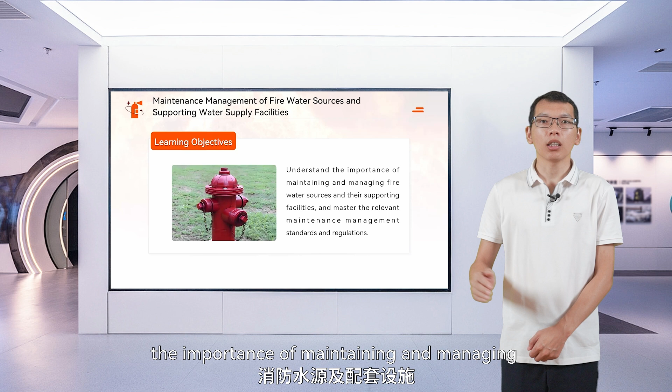Let's briefly introduce today's learning topic, maintenance management of fire water sources and supporting facilities. Through this lesson, you should understand the importance of maintaining and managing fire water sources and their supporting facilities, and master the relevant maintenance management standards and regulations.

Starting from the source end, the maintenance management of fire water sources should comply with the following provisions. 1. Monitor the pressure and water supply capacity of the municipal water supply network quarterly to see if it meets fire extinguishing requirements. 2. Conduct an annual inspection of the normal water level, low water level, flood level, as well as the flow rate or storage volume at low water level for natural rivers, lakes, and other surface water fire sources.

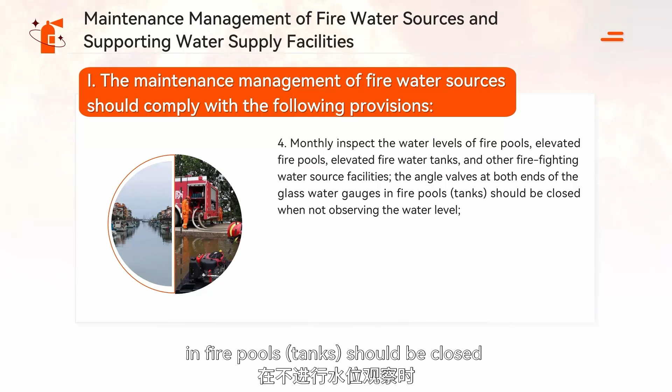3. Annually determine the normal water level, lowest water level, highest water level, and output volume for water wells and other underground fire water sources. 4. Monthly inspect the water levels of fire pools, elevated fire water tanks, and other firefighting water source facilities. The angle valves at both ends of the glass water gauges in fire pools and tanks should be closed when not observing the water level.

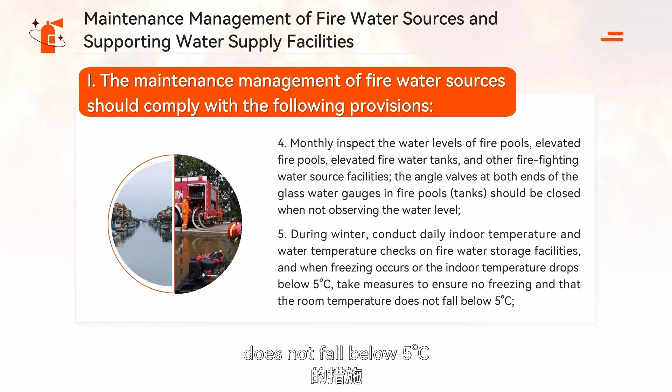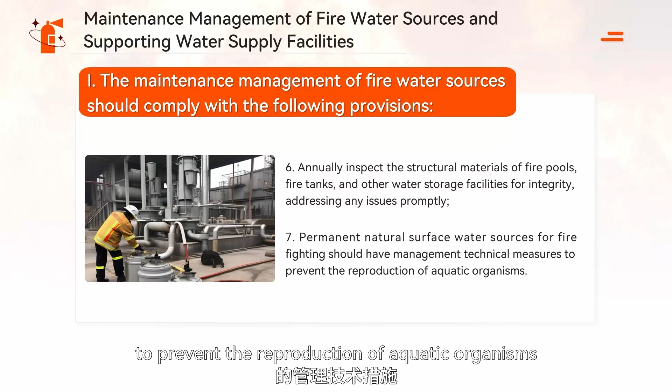5. During winter, conduct daily indoor temperature and water temperature checks on fire water storage facilities. When freezing occurs or the indoor temperature drops below 5 degrees Celsius, take measures to ensure no freezing and that the room temperature does not fall below 5 degrees Celsius. 6. Annually inspect the structural materials of fire pools, fire tanks, and other water storage facilities for integrity, addressing any issues promptly. 7. Permanent natural surface water sources for firefighting should have management technical measures to prevent the reproduction of aquatic organisms. The normal function of the fire water source ensures the availability of water.

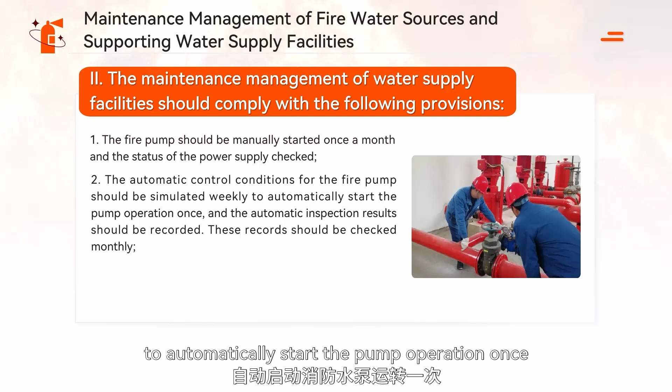Next is the maintenance and management of the water supply facilities, which should comply with the following provisions. 1. The fire pump should be manually started once a month and the status of the power supply checked. 2. The automatic control conditions for the fire pump should be simulated weekly to automatically start the pump operation once, and the automatic inspection results should be recorded. These records should be checked monthly.

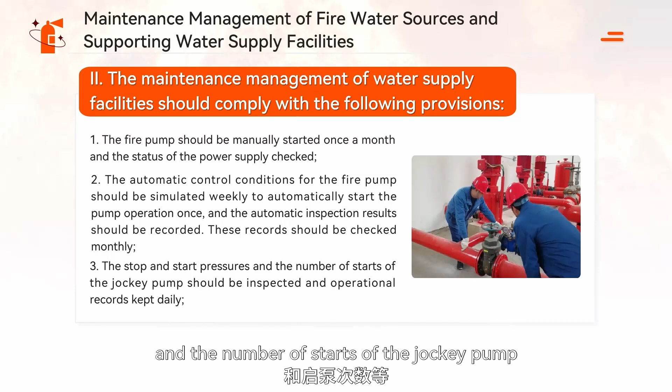3. The stop and start pressures and the number of starts of the jockey pump should be inspected and operational records kept daily. 4. The battery charge level of diesel engine fire pumps should be tested daily, the fuel storage tank's fuel level checked weekly, and the diesel engine fire pump manually operated once a month. 5. A flow rate and pressure test for the fire pump should be conducted quarterly. 6. The pressure and effective volume of the pneumatic water tank should be tested monthly.

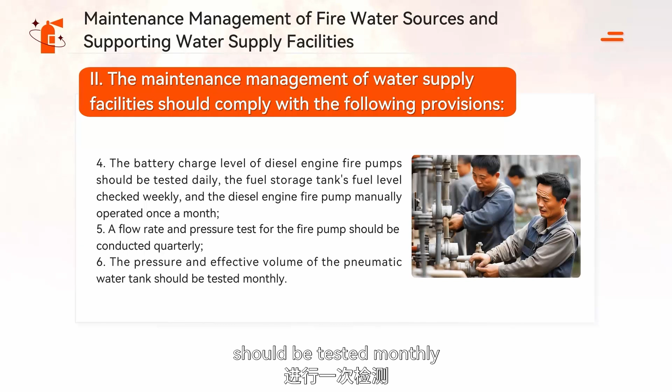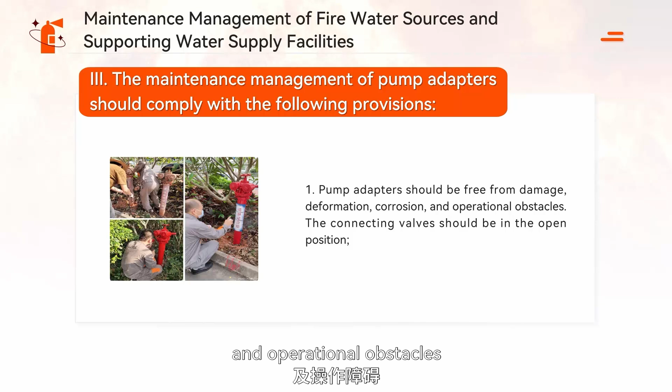Pump adapters, as one of the common pieces of equipment, are also very important in terms of maintenance and management. The maintenance and management of pump adapters should comply with the following provisions. 1. Pump adapters should be free from damage, deformation, corrosion, and operational obstacles. The connecting valves should be in the open position. 2. An inspection of the interfaces and accessories of the fire pump adapters should be conducted quarterly, ensuring that the interfaces are intact, without leakage, and that all blanking caps are complete.

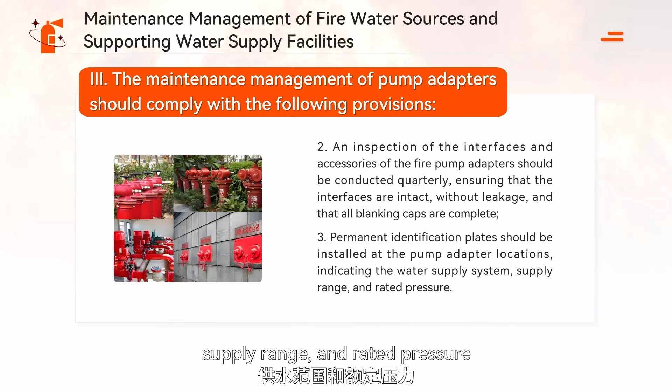3. Permanent identification plates should be installed at the pump adapter locations, indicating the water supply system, supply range, and rated pressure. Additionally, various valves and filters on the fire piping must also adhere to specific maintenance and management regulations. 1. A discharge test should be performed on the pressure-reducing valve assembly monthly, and the pressure before and after the pressure-reducing valve should be tested and recorded. If the values do not meet the design specifications, adjustments and repairs meeting system requirements should be undertaken.

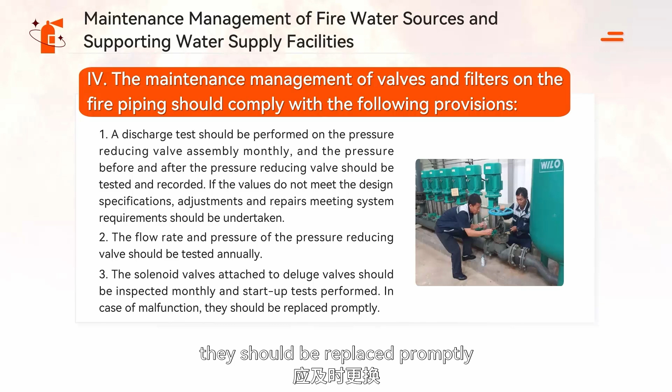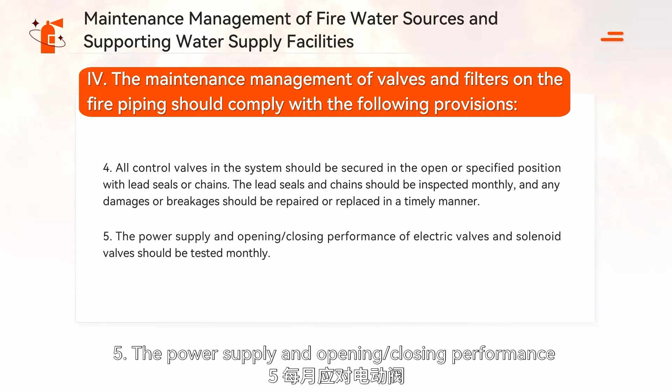2. The flow rate and pressure of the pressure-reducing valve should be tested annually. 3. The solenoid valves attached to deluge valves should be inspected monthly and startup tests performed. In case of malfunction, they should be replaced promptly. 4. All control valves in the system should be secured in the open or specified position with lead seals or chains. The lead seals and chains should be inspected monthly, and any damages or breakages should be repaired or replaced in a timely manner. 5. The power supply and opening/closing performance of electric valves and solenoid valves should be tested monthly.

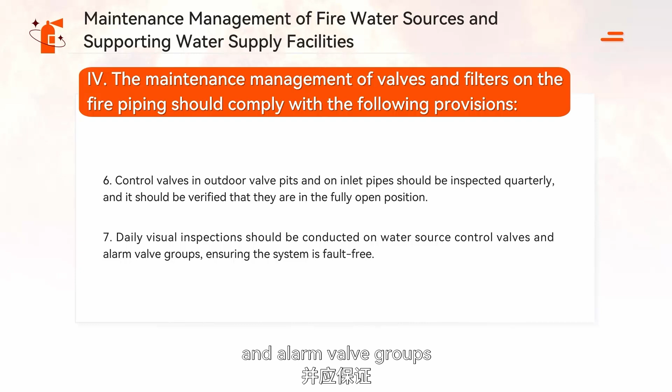6. Control valves in outdoor valve pits and on inlet pipes should be inspected quarterly, and it should be verified that they are in the fully open position. 7. Daily visual inspections should be conducted on water source control valves and alarm valve groups, ensuring the system is fault-free. 8. A discharge test should be performed quarterly on all end-of-line test cocks and alarm valve discharge test valves within the system, and it should be checked whether the system activation, alarm functions, and water discharge are normal.

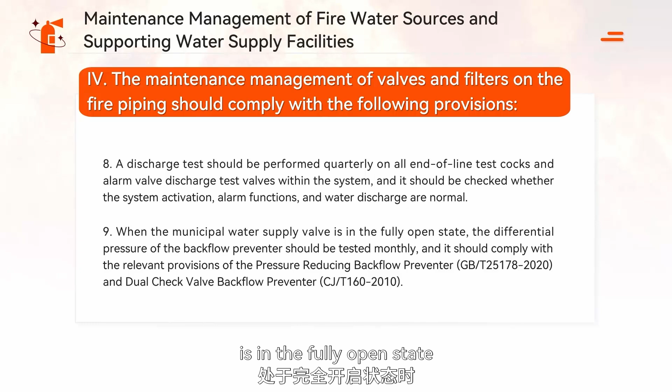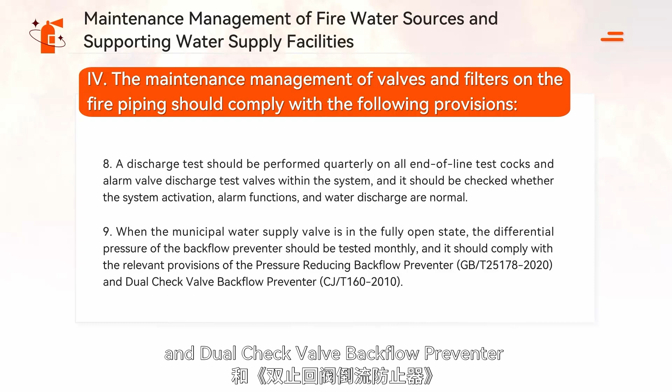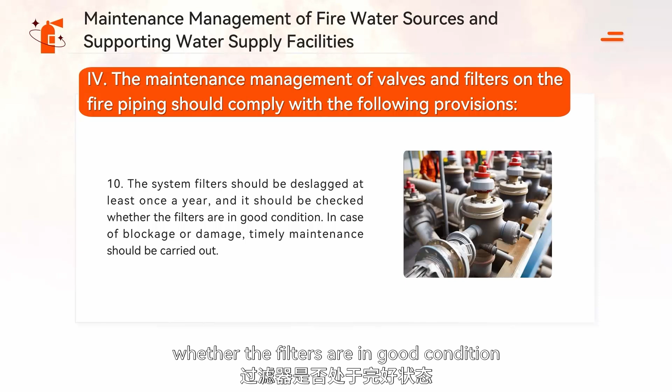9. When the municipal water supply valve is in the fully open state, the differential pressure of the backflow preventer should be tested monthly, and it should comply with the relevant provisions of the Pressure-Reducing Backflow Preventer GB/T 25178-2020 and Dual Check Valve Backflow Preventer CJ/T 160-2010. 10. The system filters should be deslagged at least once a year, and it should be checked whether the filters are in good condition. In case of blockage or damage, timely maintenance should be carried out.

Alright, that concludes our discussion on the maintenance and management requirements for fire water sources and supporting water supply facilities. I hope you have grasped the relevant maintenance and management standards and regulations. In practical work, you should be able to operate and maintain the fire protection systems correctly, thereby improving work efficiency.